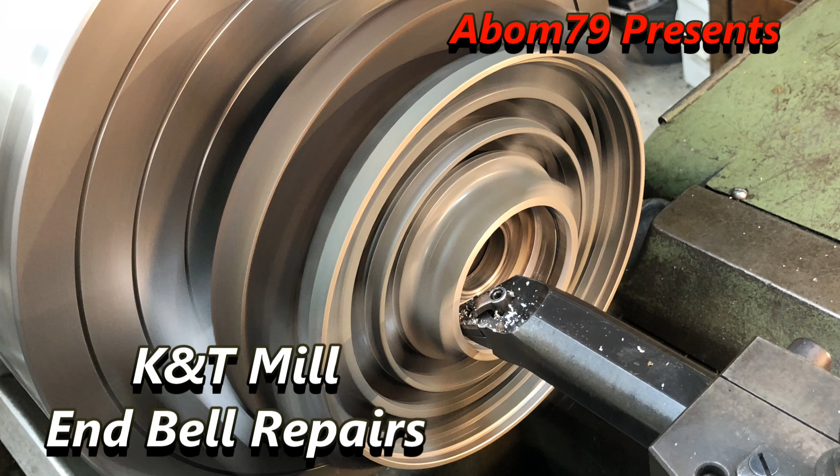All right, we're going to go ahead and start on one of these end bells. So I've got the plate chucked up in the four-jaw here. I've not indicated anything yet. You can see we got runout there. So we're running out this way and the consistency of the center there.

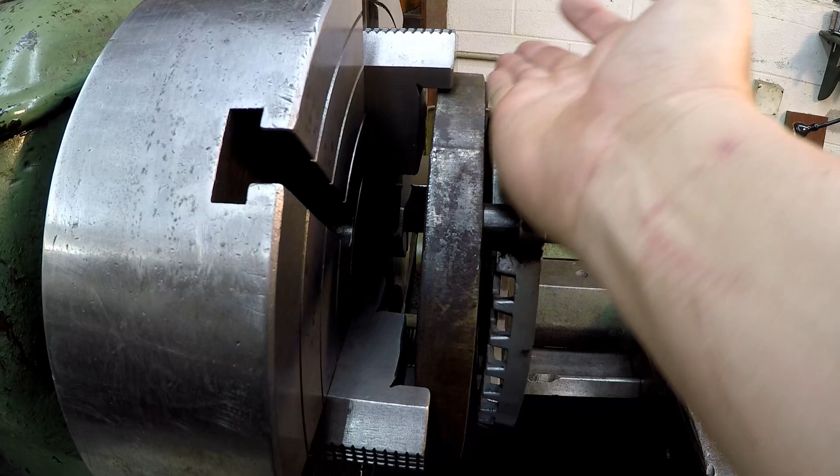I want to point out that I'm not pushed up against the jaws there. If I was pushed up and I was trying to bump this around, it would make it really difficult. So I left it out so that I can bump this face nice and true on the plate. Let me get you closer, I'll show you what I mean. You see the gap there between the plate and the back of the jaw, that's what I mean. So that'll give me room there and get in here and bump this so that we can get the face of the end bell running nice and true.

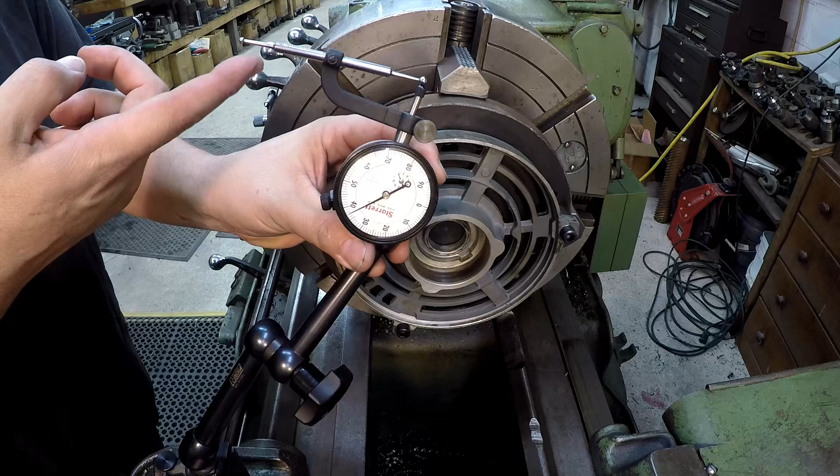Since I got so much runout off of center, I'm going to go ahead and start with that bore and get it a lot closer, and then I can move on to the face. So I'm going to use my Starrett number 670 attachment. Let me hold it in a different position so it'll work. Very simple, easy way to indicate the ID of something. I just like using my big indicator, 1-inch travel indicators.

All right, that's getting us pretty close right there. I'm going to go ahead and move on to the face. Looks like I'll have to move. Well, looks like I am out there on that. There's an area of this bore that hasn't been touched with the bearing, and that's what you can use to indicate it. But we'll also be verifying this register here where it's been machined.

It's just a small area. It's hard to get into, especially on the face. And then there was one spot that I noticed some chatter, so the indicator might do some jumping as it's rolling across there. That's the reason why I got it kind of centered, so that whenever I indicate this face, it wasn't falling off there. 10, 20, about 25, 26. That ain't too bad for just sticking it in there and tightening the jaws.

So we're going to look for our high, which is going to be over here. I think what I want to do is maybe get a bar and a better hammer to tap on this plate instead of trying to get in here with the nylon right there. All right, I got my brass bar that we can put in there, and we got the big boy Stanley that we can use. Let's see how this works right here. More good.

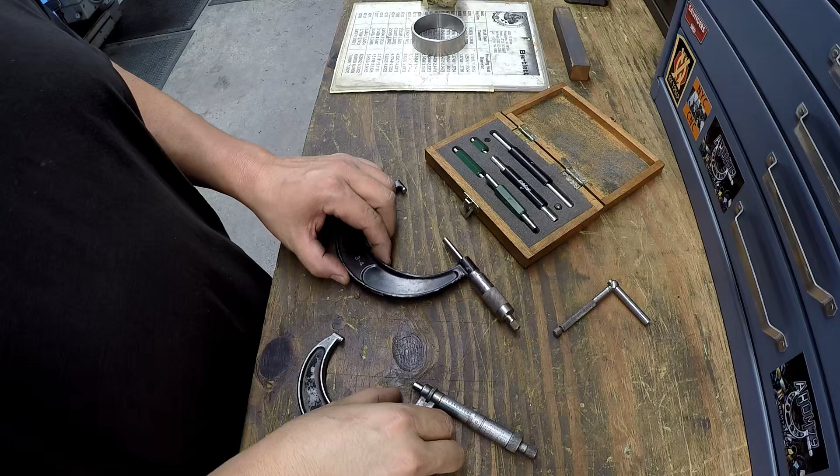Looks good. Before I get started doing any machining, I was going to verify my mic, so I'm going to be using Granddad's Starrett 2 to 3, and then I've got this Brown & Sharpe 3 to 4. That's a really nice mic. This was one that a viewer had given me a long time ago, and I just like it. It's a nice mic. So I'm using my Mitutoyo standards right here. We're going to use the 3-inch, and always make sure that everything's clean on the ends.

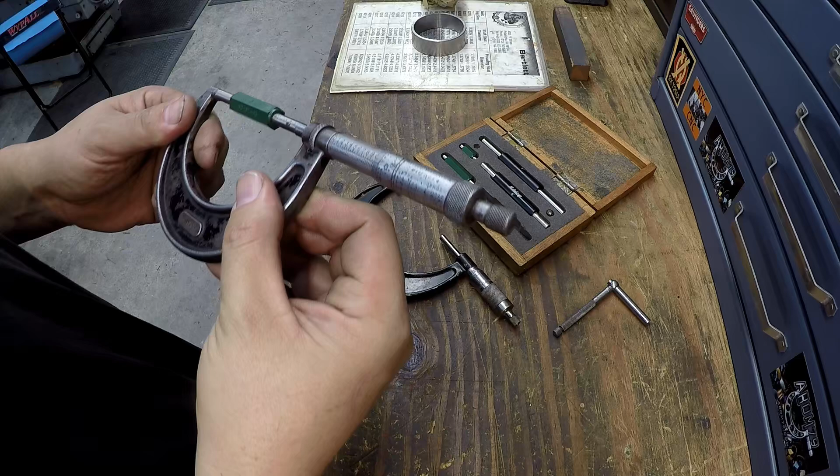And I like to just verify it whenever I'm doing these bearing fits, just to make sure that I'm going to be reading right, because I'm going to be reading into the tenths when I'm finished this thing. So I'm just running it up with my finger. You can use the thimble if you want to. It's on it. So that's good. This mic, that's why I always use it, because it always reads right on what it needs to.

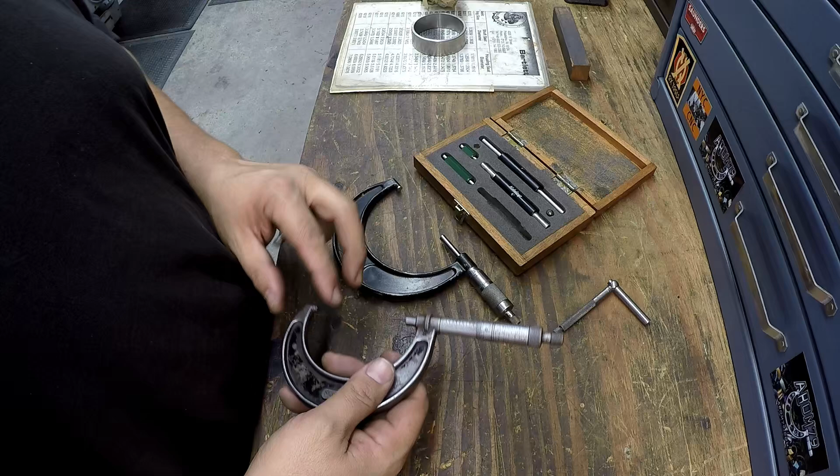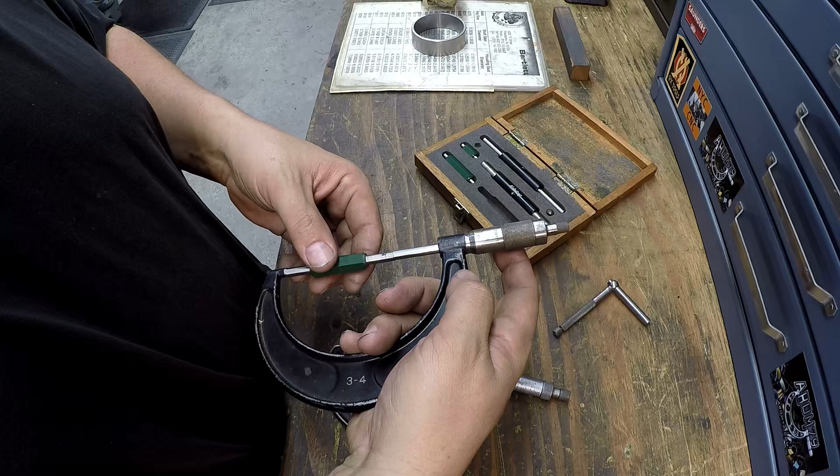It's an old mic, but it was Granddad's. You can see his initials there and there. My dad used it for years, and now I've been using it for years. And it's Brown & Sharpe. It always reads real good also. We'll come in here and do the same thing. And we're reading 0 on this one as well. Now, this is a good mic right here. I really like this Brown & Sharpe. It's a good mic. All right, so there's our mics that we're going to be using.

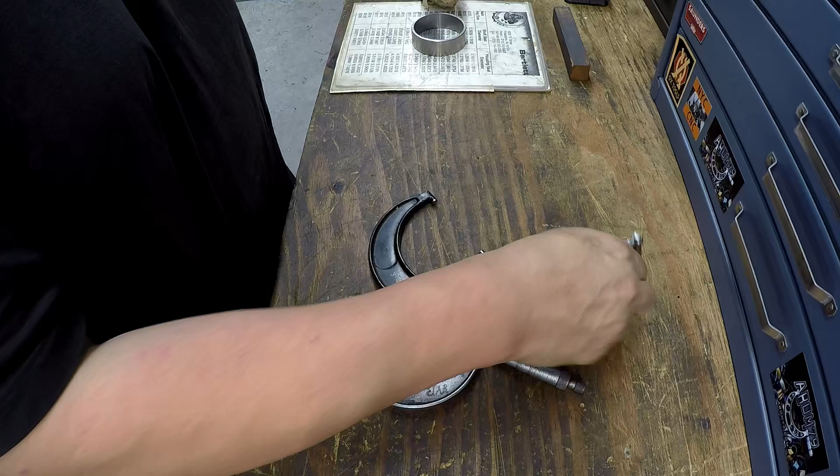I'm also going to show you my chart there, and I'll be using my telescoping gauge to get my measurements there. All right, so here is the cast iron sleeve that we'll be pressing in there. This is what we're going to bore to finish. And then our paper right here, it says 3.081 inches. That's going to be the diameter of the bore for this to press in there or shrink fit. I don't have liquid nitrogen, and I don't have any dry ice right now, so I'm just going to plan on pressing it in there.

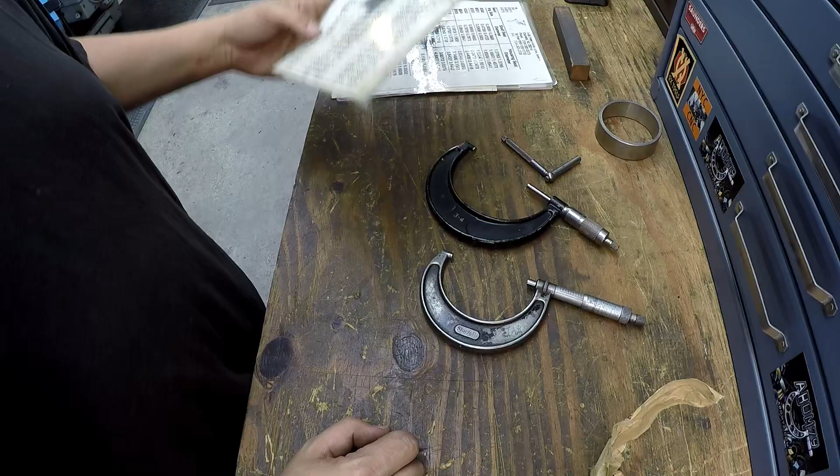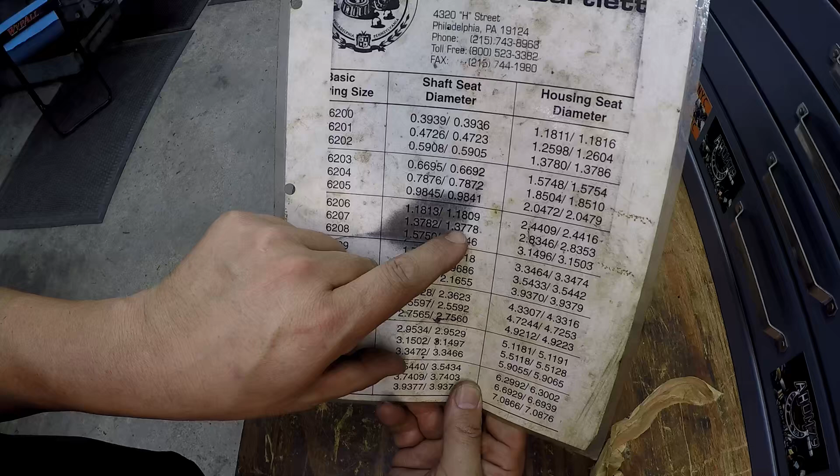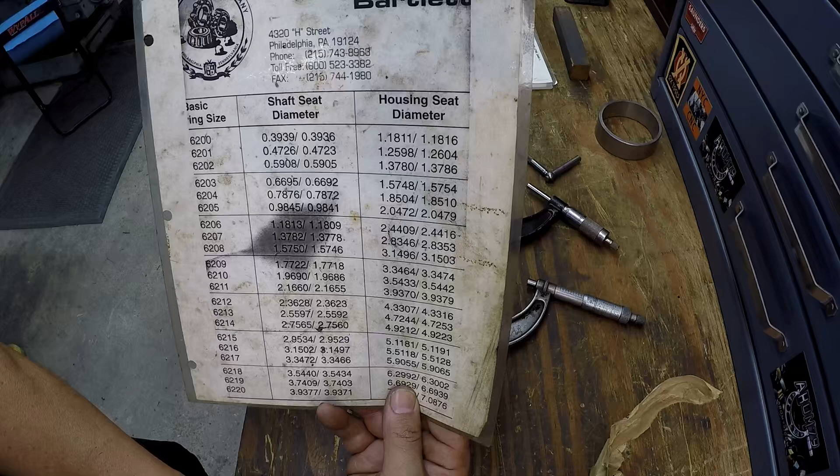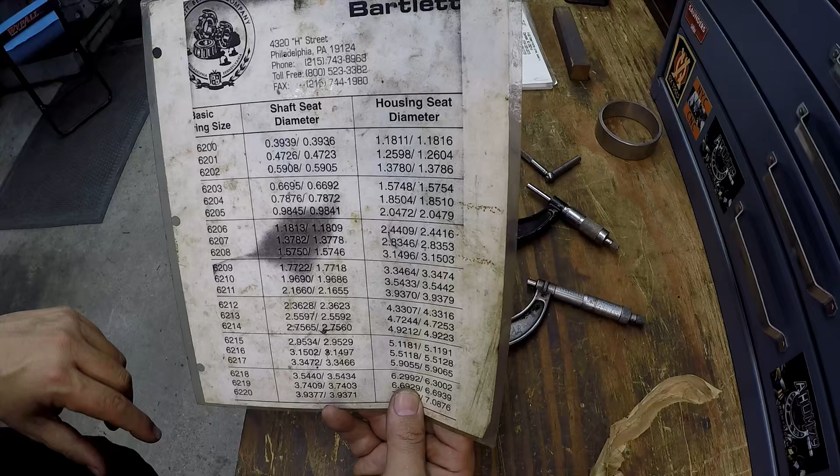All right, and then going through some of my charts. So here is how I'm going to get my fit. If you look at 6207, this is your shaft fit right there, but you have a maximum and minimum size. And then if you go across to this right here, this is going to be your finish for a 6207 bearing, reading in inches. So 2.8346 is going to be your minimum bore size. 2.8353 is going to be your maximum there. So it gives you a little bit of a tolerance to fall within. So you have 4, 5, 6, 7. So you have about 7 tenths that you can fall within in order to give it the proper fit that it's supposed to have for the bearing to go in there.

The way that I was told is that on these end bells, even though it might seem like a press fit, they're not actually supposed to be a press fit. They should push in with a little bit of resistance, but not a press fit. And one of the reasonings behind that is that whenever this thing gets up to operating temperature, the thermal expansion gives it the proper fit once it warms up, and then it's actually pushed against this bore right here. So anyway, this is just one of my charts right there. I got another one that I use at work that says for electric motor housing and shaft fits.

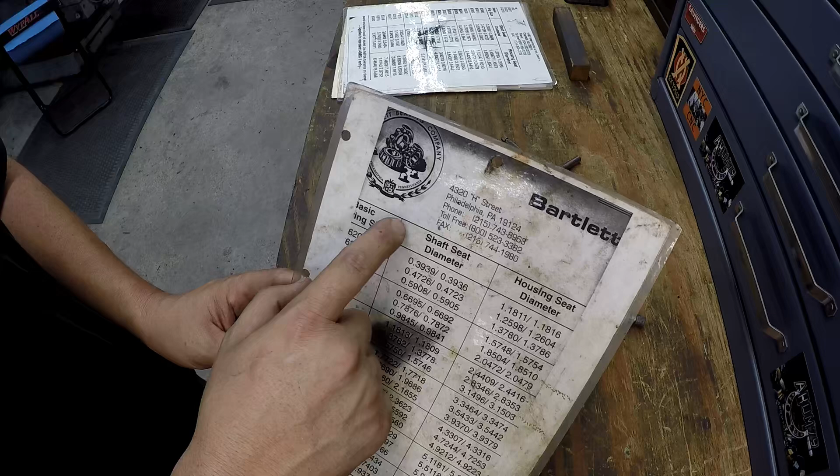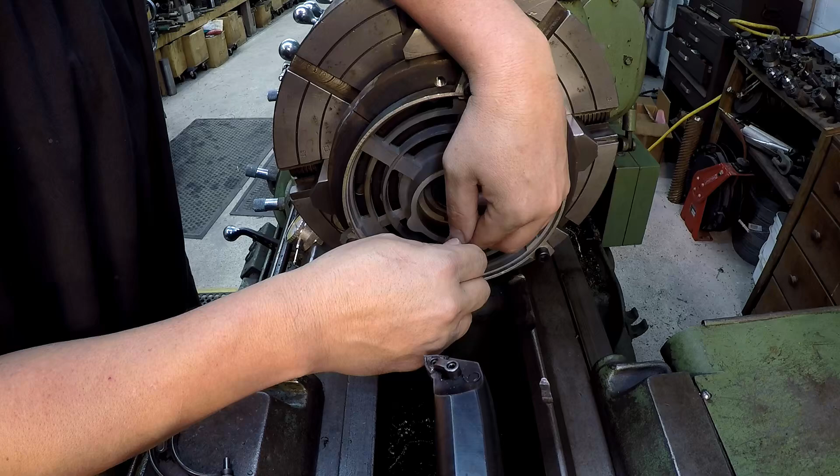I'm going to get a measurement inside this end bell just to kind of see where we're at on sizing using my telescope gauge. And so our maximum was going to be 2.8353. And right there I'm getting .836. So we're well over the maximum on the tolerance there, so we know we need to bore it for our sleeve.

So what I've done, and this is usually what I do on an end bell, I don't want to go all the way to that shoulder, but what I do is I bring the tool in there and I touch it, and then I set an indicator over here on this side, and I move it back an 1/8 of an inch. So we're gonna give it an 1/8 of an inch before that shoulder is where we'll stop at. I'll start with a 50 thou cut. We're only gonna be taking a 1/4 inch out of this, but I like to just see how it's gonna react.

Yeah, it's got one of those steel inserts in there. That's how a lot of end bells were made, like this. And you can clearly see the steel insert in there.

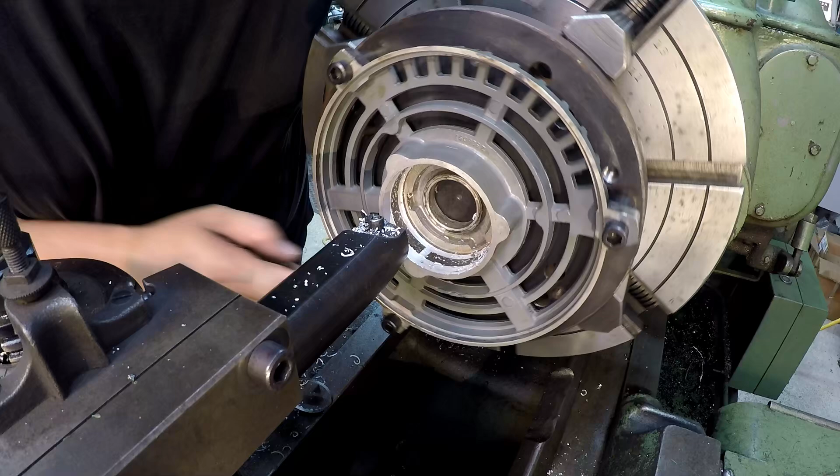There you go. Take a look at that so you can see it before we cut it all out of there. There's the steel insert. All right. Go ahead and finish this thing up.

Starting to get into some cavities that's casted inside this thing. I'm looking through, it's not breaking through on this outside or on the back side of it there. It just looks like it's a void inside the casting there.

We're just about there, and because of the thickness of this, I'm not going to go that full press fit that they recommended. I'm gonna only give this thing 2 thousandths. It said 3.081 is recommended. I'm miking it at 3 inches, 85 thousandths. So we're gonna make this 3.083 and give it 2 thousandths press fit.

All right, this should have been our size to where we want it. Let's go ahead and double check it. Very good, we're right there. I want to put a little chamfer right there and polish that bore, make sure there's no fuzzies in there that's going to bind up. And then we'll take it out of there and press the sleeve in.

Alright, so we're going to take this out, we're going to go to the press and press the sleeve in there. And once we're done, we'll just come back and then we're going to re-indicate this thing. And then we'll finish the bore.

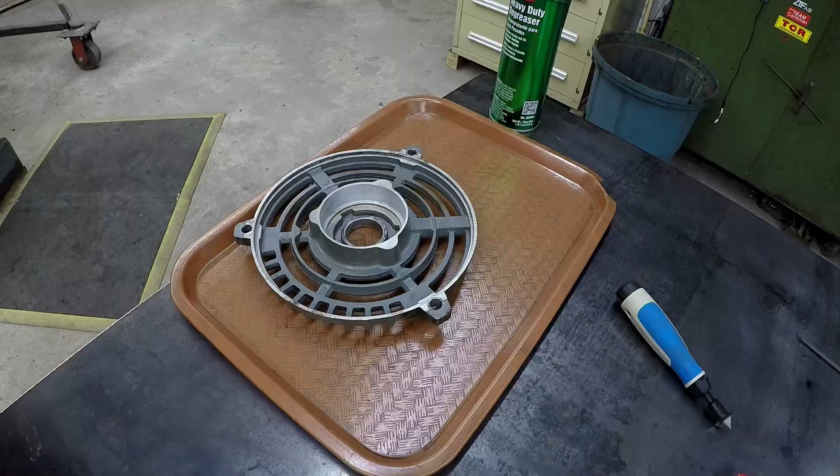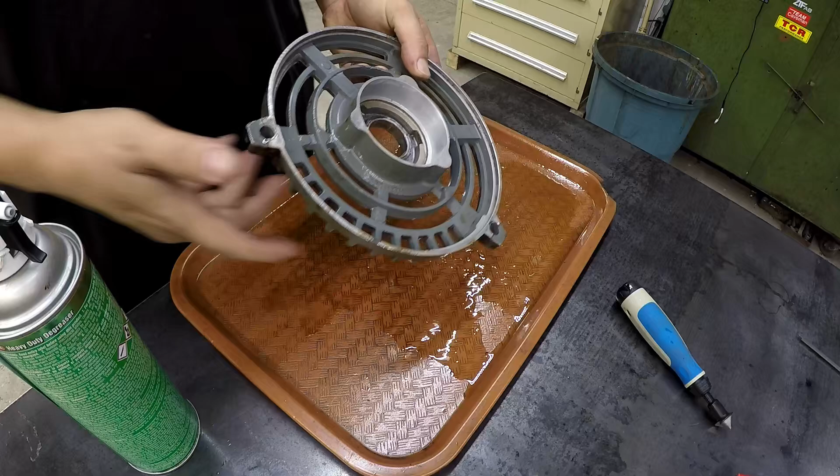There's a little bit of oil trapped down in there. I want to clean that out, so I'm going to use my CRC heavy duty degreaser. I'll just go down there and blow it out real good and wipe it, and that should be pretty good stuff right there. Leaves no residue and evaporates quickly.

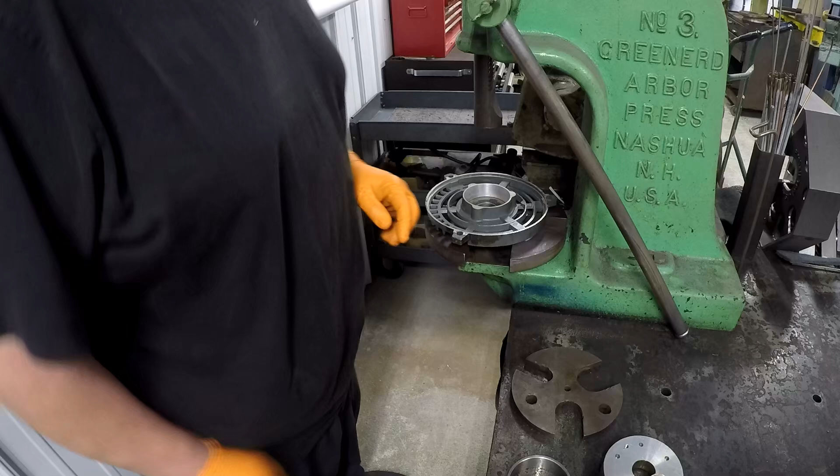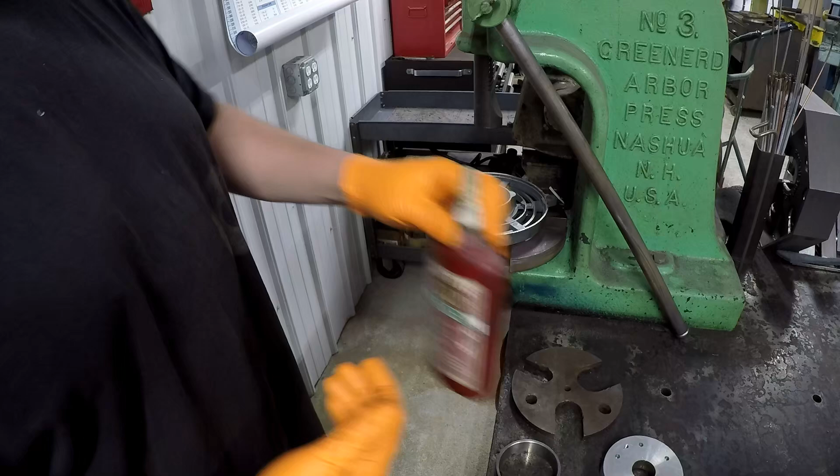I'm going to give my arbor press a try to get this in there. So we got that cleaned out. I've also cleaned the sleeve itself with the degreaser, and I'm going to put a little bit of my 680 Loctite on this just to help. That's an adhesive, so it'll bond in there and it should not come out.

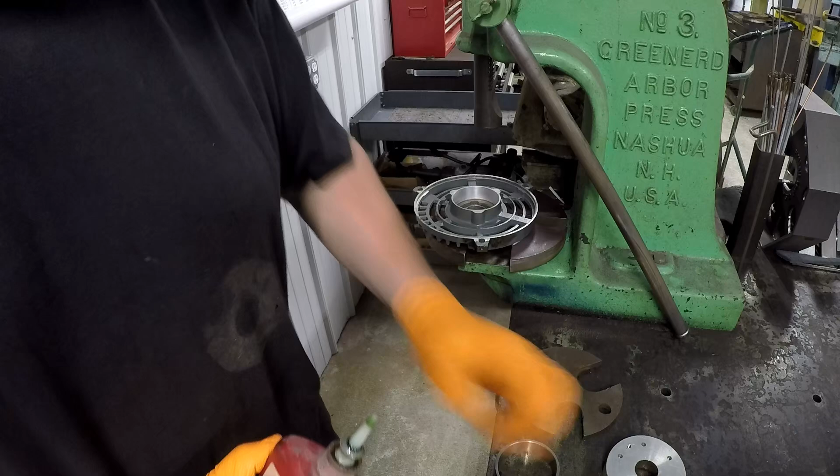680 is actually for a slip fit. This is where I use this a lot for slip fits there, but it'll still work. It's just the 609, which is for a press fit, is a little bit thinner. All right, so I'm just going to put a little bit in there. It ain't going to take much. I'm just going to put a little bit like that, and then I'll rub it around.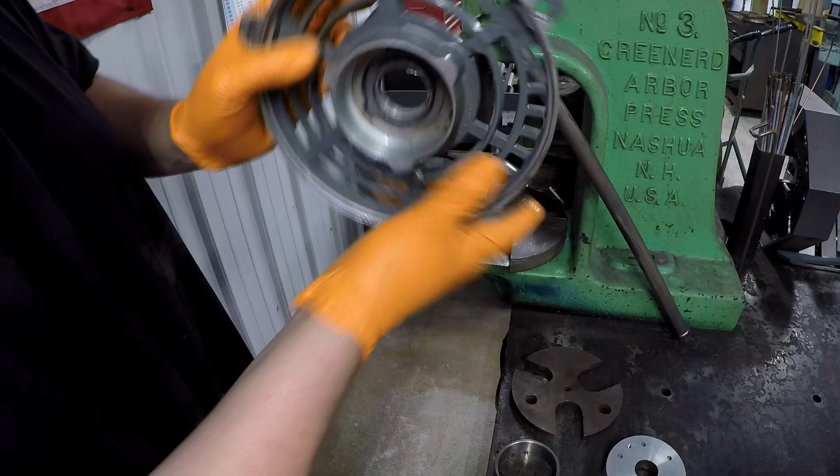Just a drop more right there. You just want to make sure that whenever you're using any kind of Loctite product like this, that it's covered well on the two mating surfaces there. Okay, I'm going to put a little bit on the sleeve also. Just rub it all the way around, make sure it's covered real good. All right, and hopefully we'll have a good successful press right here.

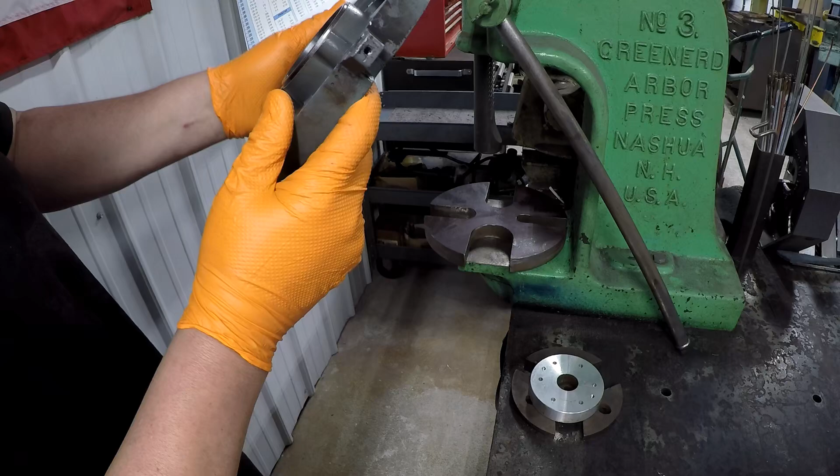Felt nice and tight going in there. And I feel good about having the Loctite there too. That'll create a very strong bond between the two metals. And that thing will never come out of there unless you heat it up and cut it out of there. All right. Alrighty, let's get it bolted back up.

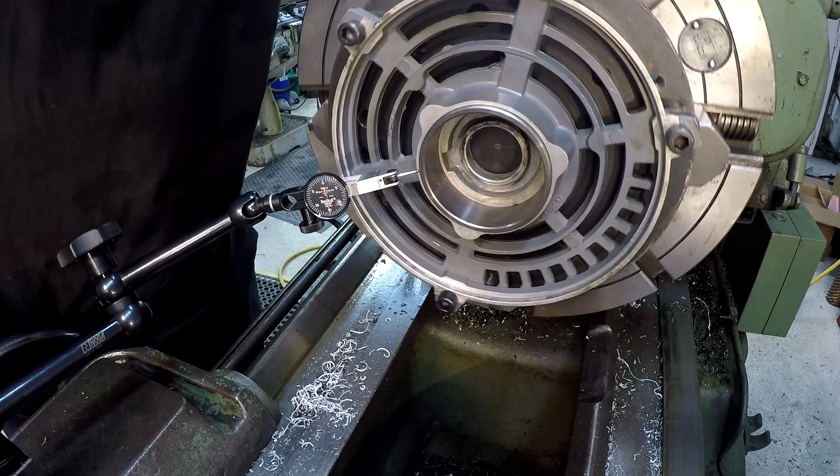Okay, I've got the Brown & Sharpe BesTest indicator set up on what's left of this face here to check it. I'll just stick it on 15 there, and let's see how close it is. Remember, I had it originally within about 2 thousandths square. So it looks like that's 1, 15, it's 1.5 thousandths.

That's within 1 thousandth right there. These two seem to be the, try it again, it's 15. That's about 1 thousandth. I'm gonna leave it where it's at. I mean, it's pretty good. It pulled right back up.

But we need to go ahead and make sure that we're in the center now, so I need to do some indicating there. We might go ahead and go back to this edge right here and make sure that this part of the housing is in the center. All right, to make my job easier, I'm going back to my Starrett 670 attachment.

We should be able to clear everything and just make sure. Yep. Okay. All right, well, we need to make a little bit of an adjustment here. That's tight. I'm going to work opposite jaws. We just want to make sure that the opposing jaws are about even as you can get it. So that's about 2 thousandths right there, 2 or 3, depending on where that needle stops.

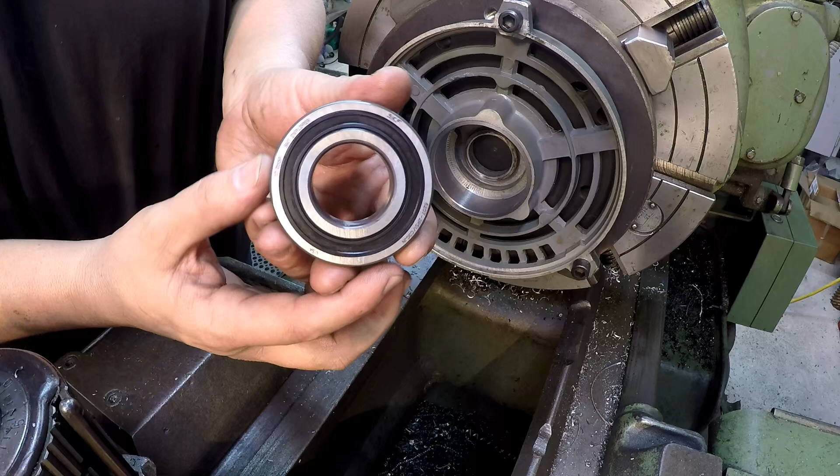And there we have it. We hit our 834 and 6/10 on the mic. I'm gonna leave it right where it's at. That is a good fit on the minimum size required for that housing there. There's our brand new bearing, SKF 6207. Feels like money.

I can tell that the fit is right there where it needs to be. It's trying to go in there, but you got to get it perfectly aligned, perfectly straight, and then once you do get it straight, it'll push in there with some resistance. So I'm not going to get it stuck in there, but I just do that because I know that it's on size. If you bore that thing over, which is a sickening feeling, if you bore that thing 1/1000th over what you're supposed to, the bearing will just fall in there, and you can't leave it like that because that's what you're trying to correct, is a loose fit. So this is going to be good right here.

All right, awesome. So I'm going to do the other one just like you see me do right here. I'm not going to video it because it's going to be identical process. So I'm going to go ahead and knock that one out, and then I'll come back and we'll see both of these finished, and then after that we're going to move on to the rotor.

I just wanted to show you this. This is the second end bell. I wanted to go ahead and mic that bore. I wanted to see how much oversize it was, and where I mic'd it, where the worst wear is, it's 5/1000ths over what it should be. And I've got the new bearing stuck in there, and you can see just how loose this is. See that rock? If you look down there, you can see there's a step in there. It's probably hard to see, but there's a step.

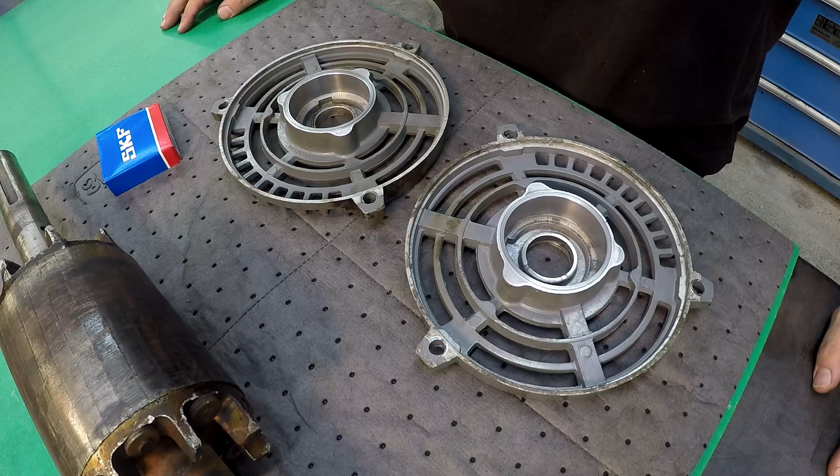All right guys, both of the end bells are done and ready to go. So this is the one that I just did that I didn't film, this one here, and then this is the one that you did see filmed, and both of them turned out good on size. I'll show you this one like I did the other one. I can get it started down in there. I can feel it starting to go. So, all right, this phase is done.

And so now what we're gonna do, next video anyway, we're gonna start on this rotor shaft right here. So I mic'd this end right here. This is the one I wasn't sure if it was good, but this is bad. It's actually not round. So if you mic it in one place, it's showing that it's right on the minimum, and then if you turn it and mic it again, it's going to be about 1/1000th under. So this is a bad fit.

And of course this side is a bad fit right here. This is 5/1000ths under the minimum right there. So I mean, it's just flopping around right there on that side. That's why there's so much movement going on. So this will be the next video, and I plan to do my spray welding technique to repair these, and hopefully you'll tune in and check that out. So I'll probably start on that very soon.